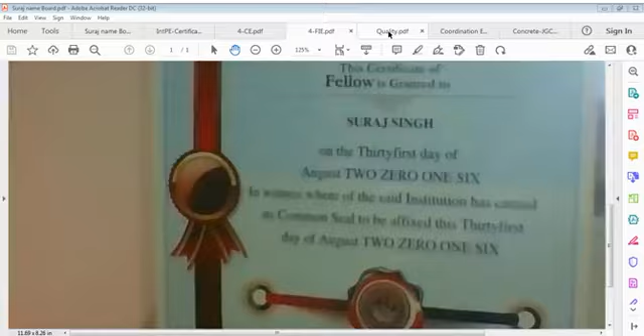Fellow institution of engineers, FIE, quality file, coordination file, and Japan's specifications of concrete are very important for this time, and of course we have to discuss about this.

I close with my certificates, chartered engineer as well as fellow. Now the important files are here: issue of quality, that is very important - quality coordination, issue of quality, issue of coordination. First we discuss a little on this and then move on to the concrete file, which is the intensive talk today.

Quality - is it important or is it not important? We have a duty to decide what we have to do, how we have to do it, what can we do. All these are important issues that we should be serious about.

It's easy to say, saying is always easy, but achieving is the important one. We can say okay, I will do it sometimes, but can we do it? That's the point of view.

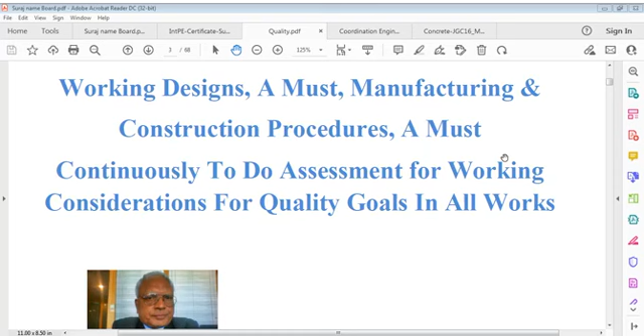So we have to keep this in mind - working designs are a must, manufacturing and construction procedures are a must, continuously doing assessment for working considerations for quality goals in all works. And we can say fixed quality in our country, Bharat, India - come what may, no excuse for concessions. Work quality cannot be compromised, and therefore we do not intend to compromise just in the name of a fragile existing quality system, compliance, formality, and excuse.

Quality system may fail, but works quality must perform and be delivered. But it doesn't happen currently in the entire scenario in our Bharat, India. And we say, as preliminary considerations, where does quality exist? Nowhere, I can say. Generally the answer is unsuccessful to find anywhere.

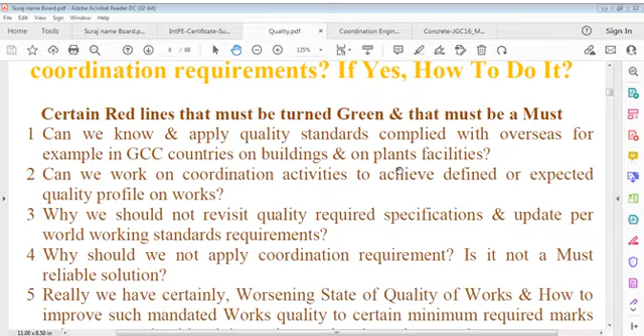Can we know and apply quality standards complied with overseas, for example in GCC countries, on buildings and on plant facilities? Can we work on coordination activities to achieve defined or expected quality profile on works? Why should we not revisit quality required specifications and update per world working standards requirements?

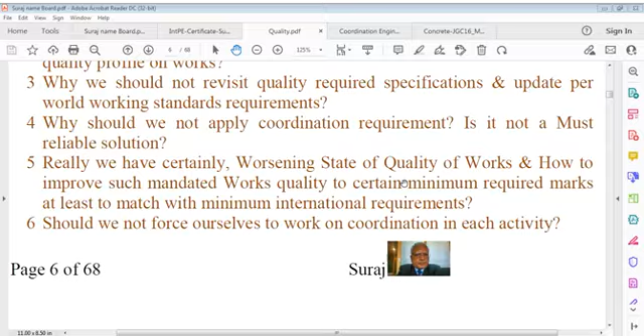Why should we not apply coordination requirement? Is it not a must reliable solution? Really, we have a certainly worsening state of quality of works, and how to improve such mandated works quality to certain minimum required marks, at least to match with minimum international requirements. Should we not force ourselves to work on coordination in each activity?

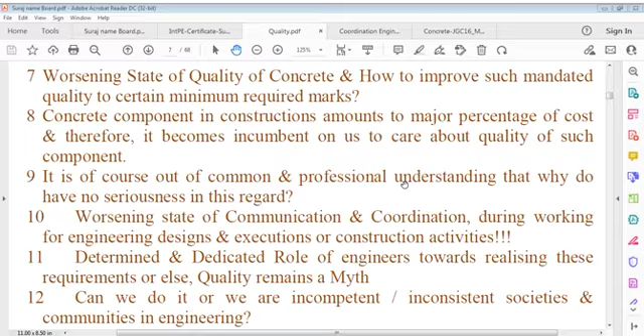Worsening state of quality of concrete, and how to improve such mandated quality to certain minimum required marks. Concrete component in construction amounts to a major percentage of cost, and therefore it becomes incumbent on us to care about quality of such component. It's of course out of common professional understanding why do you have no seriousness in this regard? Worsening state of communication and coordination during working for engineering designs and executions or construction activities.

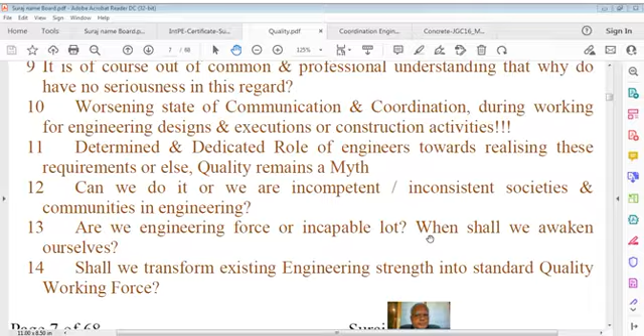Determined and dedicated role of engineers towards these requirements, or else quality remains a myth. Can we do it, or are we inconsistent societies and communities in engineering? Are we an engineering force or an incapable lot? When shall we awaken ourselves? Shall we transform existing engineering strength into a standard quality working force? Who shall decide about all such questions that are being faced?

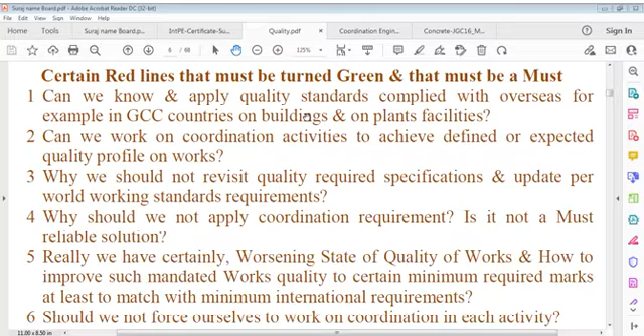We have to find a solution, and it's a fact, because I'm calling them red lines. We have to make them green, and that's why certain red lines must be turned green. That must say must, you cannot say no, it should be or it shall be. No, we have to do this. How to do this, that is a big question mark. That's why to find the answer, engineers' deliberation is a must. That's also a very important point. And deliberation, that's what my talk is a part of. We are deliberating on that.

Now going to coordination engineering projects, and that's a very important point. Coordination in engineering projects concerns the public and engineers. And of course engineers are related, engineers are responsible for what I'm saying. That's very important, you know.

Coordination is that part of life without which we cannot move. Everybody coordinates to itself. My mind coordinates to body, body coordinates to other bodies. We coordinate ourselves, and if we don't coordinate, we find mistakes. We do mistakes, and this coordination I'm talking about is engineering coordination, work coordination, technical and non-technical coordination both.

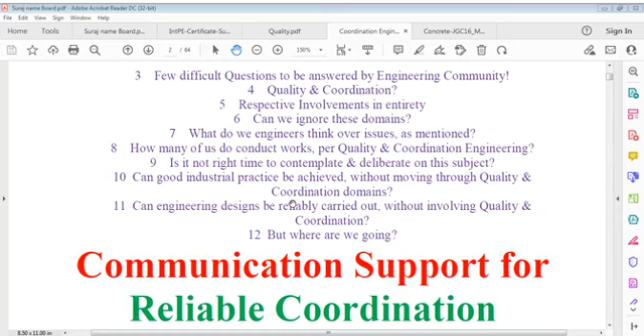And there's a gap between quality engineer and quality assurance or quality requirement engineer. We'll discuss that later on. Is it not right time to contemplate and deliberate on this subject? I say, always time is right. Then we say, can good industrial practice be achieved without moving through quality and coordination domains? That's a big question.

Can engineering design be reliably carried out without involving quality and coordination? This is a question which everybody has to think and answer. Again I say, can engineering designs be reliably carried out without involving quality and coordination?

But where are we going to? I have missed, I'm sorry. Again I repeat these questions for you. You have to think many times. Number one, is coordination engineering a must on every project? Project means all performance activities involved from pre-design to final completion of complete construction. Few difficult questions for the engineering community to answer: quality and coordination, their respective involvement in entirety.

Can we ignore these domains? What do we engineers think over issues as mentioned? How many of ourselves do conduct work for quality and coordination engineering? Is it not right time to contemplate and deliberate on this subject? Can good industrial practice be achieved without moving through quality and coordination domain? Can engineering designs be reliably carried out without involving quality and coordination? But where are we going to? And that's what is a communication support for reliable coordination.

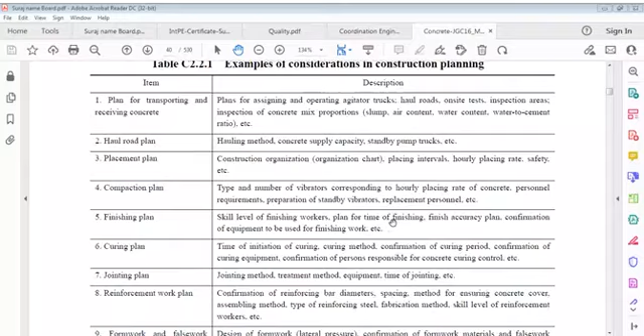If you see, here we are somewhere on quality. I remember we crossed these flow charts. We were on quality. Yeah, this is construction planning. We have gone through examples. We have taken finishing, what are examples of construction planning, and this is determination of concreting methods, determination of construction performance of concrete. No, I think this was not that one.

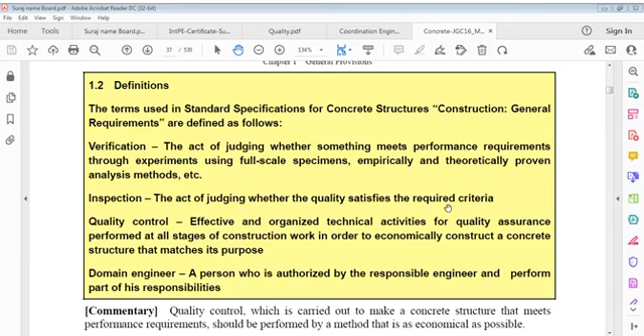I will say constitution of construction planning, and before that there was design document specifications. We are somewhere here, I think, design of structures. Here is general and approved construction, shall be approved construction. Yeah, I think I did construction plan. Definitions, verifications, inspections, quality control. Yeah, domain engineer, we defined that. Also we remember we defined it. Construction plan, okay, we did that one also.

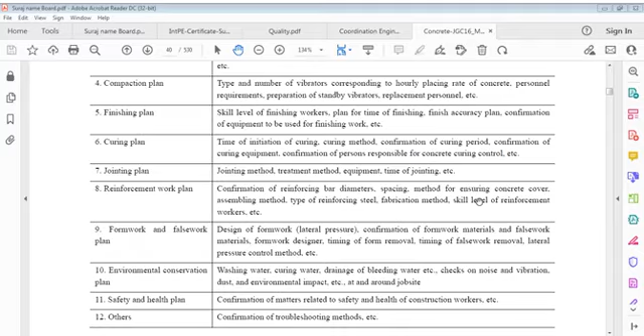Then it was done, and we had to go to construction planning. A construction plan shall be prepared taking into consideration environmental conditions and construction conditions for the construction site, giving consideration for construction safety and environment. Okay, examples of considerations in construction planning: plan for transportation and receiving, haul road plan, compaction plan, finishing plan, jointing plan. So this we had done. Determination of concreting method.

I don't remember, quality, it was something related to. Only materials of proven quality shall be used as concrete materials. Let's read this first of all, what it says, because it's very important. Even if it is revised, no problem, it's revisited, no problem, that's not the point. It says using appropriate materials. Materials of proven quality shall be used as concrete materials. Using appropriate materials is very important for producing concrete with required performance.

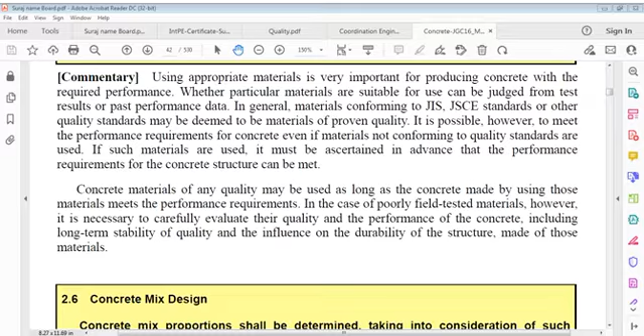Using appropriate materials is very important for producing concrete with required performance. Whether particular materials are suitable for use can be judged from test results or past performance data. In general, materials conforming to Japanese specifications, JSCE standards, or quality standards may be deemed to be materials of proven quality. It's possible, however, to meet performance requirements for concrete even if materials not conforming to quality standards are used. If such materials are used, it must be ascertained in advance that performance requirements for the concrete structure can be met.

Concrete materials of whatever quality may be used as long as concrete made using those materials meets performance requirements. In case of poorly field-tested materials, however, it is necessary to carefully evaluate the respective quality and performance of the concrete, including long-term stability of quality and influence on durability of structures made of those materials. Concrete mix design: concrete mix proportions shall be determined taking into consideration such factors as constraints, related concrete plants, availability of materials, and economy, including transportation cost, so that required performance of concrete can be achieved.

Mix design refers to the series of tasks performed to specify materials and mix proportions so that performance requirements for concrete can be met. Usually in the mix design process, materials and respective mix proportions are assumed and trial mixing is carried out. This cycle is repeated until it is confirmed that concrete mixes made this way meet all performance requirements. Characteristic values, we define that.

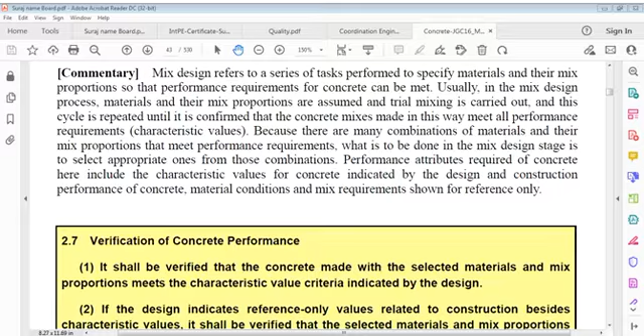Because there are many combinations of materials and their respective proportions that meet performance requirements, what is to be done in the mix design stage is to select appropriate ones from those combinations. Performance attributes required of concrete include characteristic values for concrete indicated by design, and construction performance of concrete, material conditions and mix requirements shown for reference only.

Verification of concrete performance: it shall be verified that concrete made with selected materials and mix proportions meets characteristic value criteria indicated by design.

Characteristic grade of concrete is very important that we have to consider when we design. Then what percentages, or mixing by weight methods, means weighing every ingredient. We decide that, not by volume.

If design indicates reference only values related to construction besides characteristic values, it shall be verified that selected materials and mix proportions meet those reference only values, or meet concrete performance requirements on which the reference only values are based.

Some commentaries here. I think we had gone through this. I remember this equation we discussed. Again, I read it, no issue.

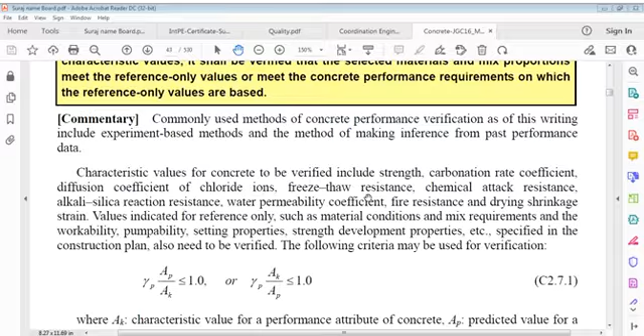Commonly used methods of concrete performance verification as of this writing include experiment-based methods and methods of making inference from past performance data. Characteristic values for concrete to be verified include strength, carbonation rate or carbonation rate coefficient, and diffusion coefficient of chloride ions. These are three items: strength, carbonation issue, and chloride penetration issue.

Then we have freeze-thaw resistance, for where ice and snowfall exist, and chemical attack resistance, sulfate and chloride attacks like the alkali silica reaction resistance, water permeability coefficient, water penetration, fire resistance, and drying shrinkage strain, etc.

So there are so many requirements, you can say. You can list this in your mind also. First is strength, very important point, then carbonation and chlorination or chlorides, freezing and thawing, chemical impacts on concrete, alkali silica and water permeability, fire resistance and drying shrinkage, and many more could be.

Values indicated for reference only include material conditions and mix requirements: workability, pumpability, and setting property. Workability we generally use, so slump control is taken - slump is workability. This leads to pumpability also, and that leads to how to pour it, and of course setting properties after pouring. After setting properties comes strength development properties, and we can say it is specified in the construction plan that we have to verify.

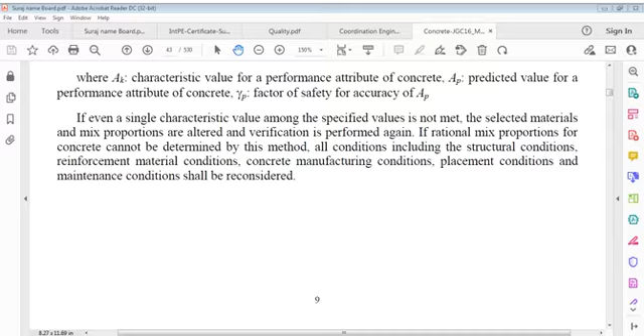This is basic. Now, confirmation and alteration of construction plan - that's also an important point. It must be confirmed by an appropriate method that the concrete construction plan meets requirements for construction work, and that performance requirements for the structure are met.

Whatever change we make in the construction plan should be made so as to minimize its influence. As a general principle, changes in construction plan should be limited to concrete mix proportions and construction methods, and not to something else. If the construction plan differs from reference values indicated at the design stage, cracking checks at the construction stage shall be made again under conditions reflecting the construction plan.

Here is some commentary. We can read it again, though I think I have done it before, no problem.

The construction plan must meet requirements for construction work, and must be such that the concrete structure built in accordance with the plan meets performance requirements. Contractor submits a construction plan in writing to the owner, and the owner checks whether the structure shown in design drawings and specifications can really be constructed, and approves the construction plan.

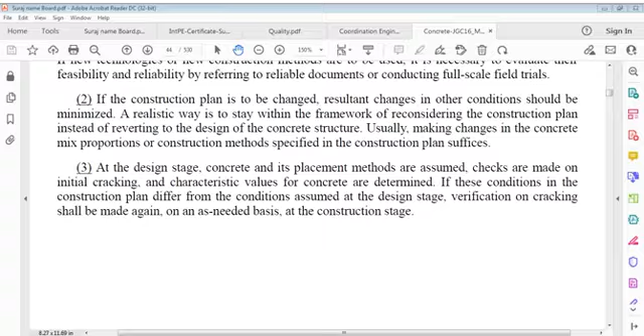Construction now we talk of. Construction of a concrete structure shall be carried out in accordance with the construction plan, because we have planned it. So that's one part: we have planned it, and it shall be done accordingly.

Construction of a concrete structure shall be carried out under supervision of a domain engineer with sufficient knowledge and experience in construction of concrete structures, stationed at the construction site. If the construction plan cannot be followed at the construction stage, appropriate measures shall be taken so that performance requirements determined at the design stage can be met.

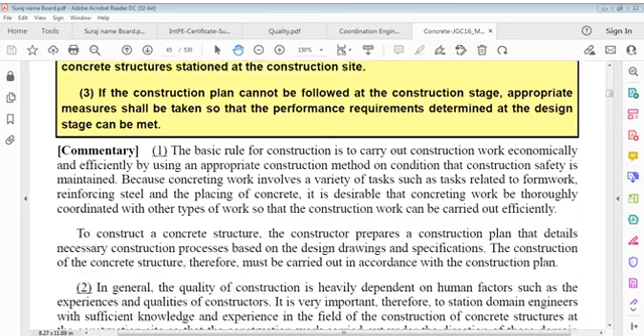The basic rule for construction is to carry out construction work economically and efficiently by using an appropriate construction method, on condition that construction safety is maintained. Because concreting work involves a variety of tasks such as form work, reinforcing steel, and placing of concrete, it is desirable that concreting work be thoroughly coordinated with other types of works so that construction work can be carried out efficiently. And here what we talk of is coordination, technical and engineering coordination.

To construct a concrete structure, the constructor or contractor prepares a construction plan detailing necessary construction processes based on design drawings and specifications. Construction of a concrete structure therefore must be carried out in accordance with the construction plan, which is based on communication and coordination. In general, quality of construction is heavily dependent on human factors such as experience and quality of constructors. Very important therefore is to station domain engineers with sufficient knowledge and experience in the field of construction of concrete structures at the construction site, so that construction work is carried out under direction of these domain engineers.

In a construction project, incidents not expected at the planning stage may occur at the construction stage. It's not always possible, therefore, to carry out construction in accordance with the construction plan. If it's difficult to follow the construction plan in a real construction project, appropriate measures must be taken following domain engineers' instructions, so that required performance can be achieved.

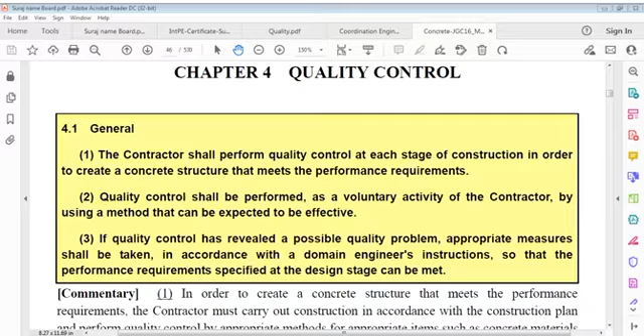Quality control shall be performed as a voluntary activity of the contractor, though it is legal. Quality control shall be performed as a voluntary activity of the contractor by using a method that can be expected to be effective. If quality control has revealed a possible quality problem, appropriate measures shall be taken in accordance with the domain engineer's instruction, so that performance requirements specified at the design stage can be met.

Now some comments say: in order to create a concrete structure that meets performance requirements, the contractor must carry out construction in accordance with the construction plan and perform quality control by appropriate methods.

For appropriate items such as concrete materials, reinforcing materials, equipment and construction methods, ensure that required quality is achieved at each stage of construction.

It is advisable, however, to perform quality control only for necessary items as often as necessary. Instead of conducting many types of tests and collecting a large amount of data, one way to check on quality on the basis of test results, besides actually conducting tests, is to examine manufacturers' test reports, as in the case of conforming products.

Usually wide variations in quality of concrete placed to build a structure not only increase the possibility of occurrence of problems at construction stage, it also necessitates use of a large factor of safety at mix design stage so as to achieve required strength. That makes the construction process uneconomical and in many cases causes decreases in durability.

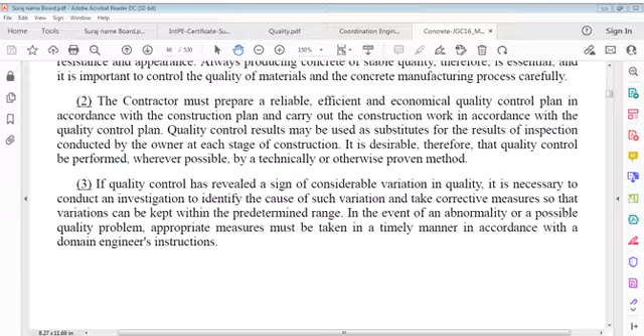In the event of abnormality or a possible quality problem, appropriate measures must be taken in a timely manner in accordance with the domain engineer's instruction.

Inspection. The owner shall conduct inspection at each stage of construction and upon completion of the structure on the owner's own responsibility. Actually it should be the engineer, no problem.

Let us see what the Japanese specification says. The owner of a structure shall draw up an inspection plan in accordance with design drawings and specifications, taking into consideration degree of importance, intended use, and purpose of the structure.

Inspection shall be conducted in accordance with the inspection plan by a method of proven reliability.

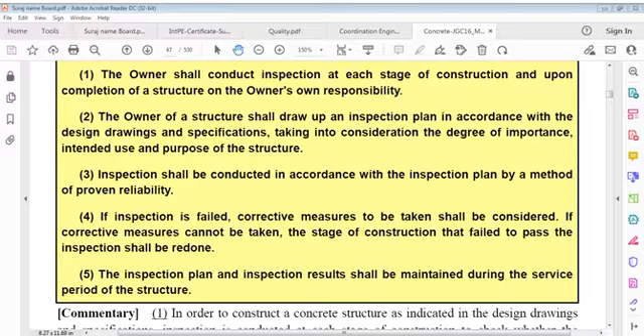If inspection is failed, corrective measures to be taken shall be considered. If corrective measures cannot be taken, the stage of construction that failed to pass inspection shall be redone. The inspection plan and inspection results shall be maintained during the service period of the structure.

What comments do we have? In order to construct concrete structures as indicated in design drawings and specifications, inspection is conducted. The video and audio went down, and we have to be very careful about why it went down. No problem, it's back again.

In order to construct a concrete structure as indicated in design drawings and specifications, inspection is conducted at each stage of construction to check whether construction work being carried out is adequate or not. Required performance of a concrete structure can be ensured by checking on performance requirements such as safety at the design stage and conducting inspection at the construction stage.

Inspection therefore must be conducted on the responsibility of the owner of the structure. Performance of a newly completed concrete structure should ideally be inspected directly. Items related to a concrete structure that can be inspected, however, are limited to only a fraction, namely concrete surface condition, locations, shapes, dimensions, etc. of structural members, of all inspection items.

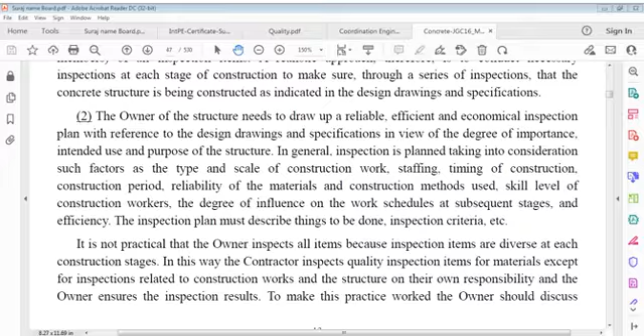The inspection plan must describe things to be done, inspection criteria, etc. It's not practical for the owner to inspect all items because inspection items are diverse at each construction stage. In this way, the contractor inspects quality inspection items for materials, except for inspection related to construction works and structure, on their own responsibility, and the owner ensures the inspection results.

The owner ensures inspection results. To make this practice work, the owner should discuss inspection methods with the contractor before actual construction begins. Results of the discussion should be recorded in written documents, where the owner records on an inspection planning document while the contractor records on a construction planning document.

Here, 'owner' refers to the owner's representative, who can be an engineer. The engineer works on behalf of the owner, and the contractor also works on behalf of the owner, because the owner of the structure has to judge acceptability of the concrete structure through inspection.

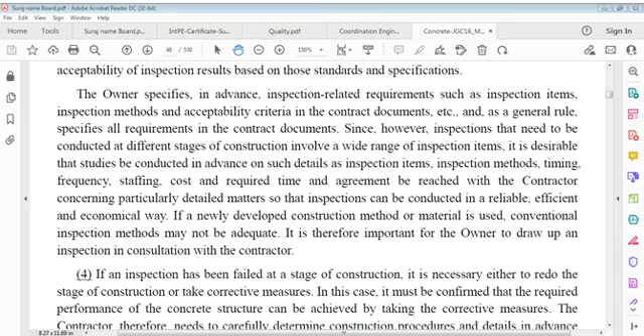If a newly developed construction method or material is used, conventional inspection methods may not be adequate. It is therefore important for the owner to draw up an inspection plan in consultation with the contractor.

If an inspection has failed at a stage of construction, it is necessary either to redo that stage or take corrective measures. In this case, it must be confirmed that the required performance of the concrete structure can be achieved by taking corrective measures.

The contractor therefore needs to carefully determine construction procedures and details in advance in connection with construction tasks that are difficult to redo. If an inspection has failed and neither corrective measures nor redoing construction is possible, it is necessary to evaluate the influence of the problem on the required performance of the concrete structure and take appropriate measures, such as demolishing and reconstructing the structure, or altering the maintenance plan and using the existing structure.

Inspection records are documents that certify the concrete structure has been constructed in accordance with the construction plan and as indicated in design drawings and specifications. Inspection records must therefore be maintained during the service period of the concrete structure. If an inspection fails at one or more stages of construction, it is important to record in detail the facts, including corrective measures taken.

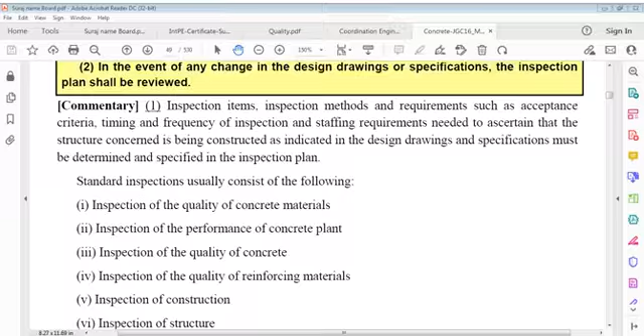Inspection items, inspection methods, and requirements such as acceptance criteria, timings and frequency of inspection, and staffing requirements needed to ascertain that the structure concerned is being constructed as indicated in design drawings and specifications must be determined and specified in the inspection plan.

Standard inspections usually consist of the following: inspection of quality of concrete materials, inspection of performance of the concrete plant (batching plant or mixer), inspection of quality of concrete, inspection of quality of reinforcing materials, inspection of construction, and inspection of structure. So: concrete materials, concrete plant, concrete quality, reinforcing material quality, construction inspection, and structures.

These are the main ones. A series of inspections conducted in connection with construction of a concrete structure includes inspection of materials, that is concrete and reinforcing bars, conducted to ensure that materials used are appropriate, and inspection of construction, conducted mainly to ensure that structures and their members meet dimensional requirements.

Specified reinforcing bars have been placed at specified locations. Concrete has been uniformly placed and compacted, and curing has been carried out as required.

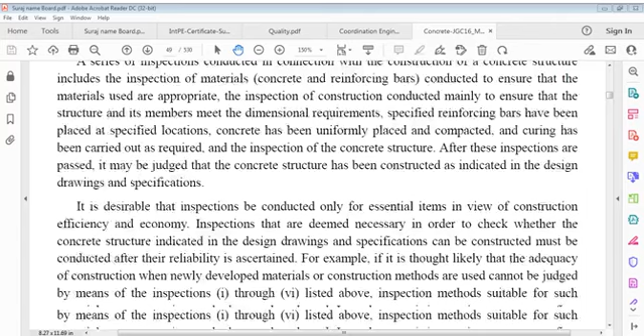It's desirable that inspection be conducted only for essential items in view of construction efficiency and economy. Inspections deemed necessary to check whether a concrete structure indicated in drawings and specifications can be constructed must be conducted after reliability is ascertained.

For example, if it's thought likely that adequacy of construction when newly developed materials or construction methods are used cannot be judged by means of inspections, then inspection methods suitable for such materials or construction methods must be adopted.

In such cases, it is very important to confirm inspection details through in-depth discussion between owner and contractor, because the inspection plan is drawn up on the basis of design drawings and specifications. If the design drawings or specifications have been changed, the inspection plan must of course be reviewed.

Conduct of inspection: inspection shall be conducted in accordance with the inspection plan. The person responsible for inspection shall judge acceptability of inspection results in accordance with predetermined evaluation criteria.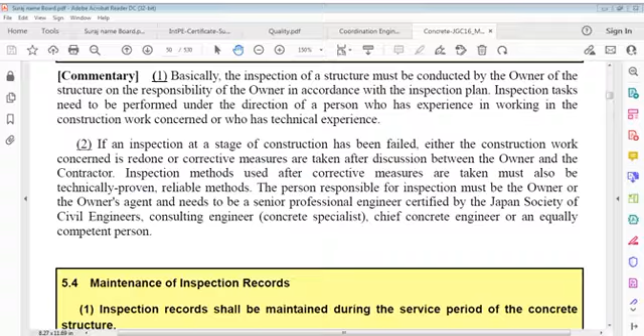The person responsible for inspection must be the owner or owner's agent and needs to be a senior professional engineer certified by the Japan Society of Civil Engineers, a consulting engineer, concrete specialist, chief concrete engineer, or an equally competent person.

Maintenance of inspection records. Inspection records shall be maintained during the service period of the concrete structure. Inspection records covering necessary items shall be maintained in an appropriate format with reference to maintenance guidelines.

Inspection records are important records or documents confirming required performance of the concrete structure, like design drawings and specifications and the inspection plan. Therefore, inspection records must be maintained. If an inspection has failed and corrective measures have been taken, records regarding their details must also be maintained.

Because inspection records are important as initial values for maintenance of a newly completed concrete structure, they must be maintained as a source of reference information so that safety, serviceability, etc. of concrete structures can be ascertained.

Construction records, general: the owner of a concrete structure shall maintain construction records during the service period of the concrete structure.

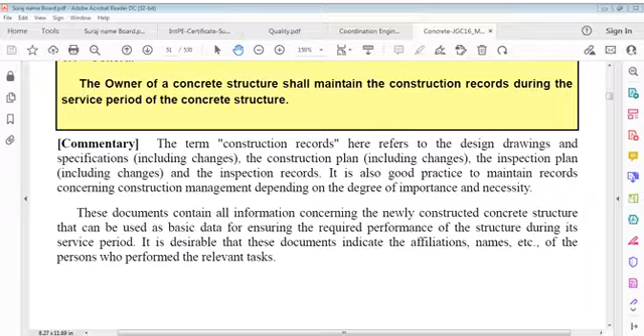These documents contain all information concerning the newly constructed concrete structure that can be used as basic data for ensuring required performance of the structure during its service period. It is desirable that these documents indicate affiliations, names, etc. of persons who performed relevant tasks—desirable meaning not necessary.

Construction standards. General construction standards: purpose of this specification, materials and construction.

Construction standards of the standard specifications for concrete structures aim to make it possible, in concreting work for new construction of an ordinary civil engineering structure, to construct a concrete structure of a certain level of quality by carrying out items indicated herein without paying painstaking attention.

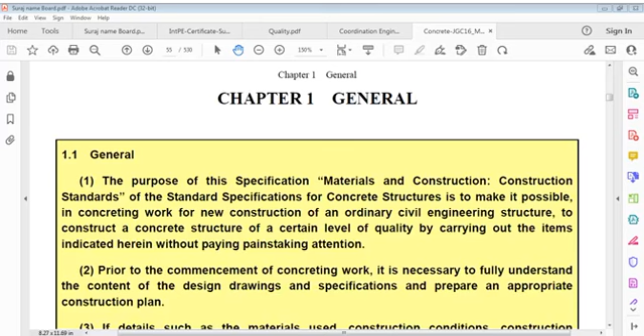Repeating: the purpose of this specification—materials and construction, that is, construction standards of the standard specification for concrete structure—is to make it possible in concrete work for new construction of an ordinary civil engineering structure to construct a concrete structure of a certain level of quality by carrying out items indicated herein without paying painstaking attention. Prior to commencement of concrete work, it is necessary to fully understand the contents of design drawings and specifications and prepare an appropriate construction plan.

If details such as materials used, construction conditions, construction environment or construction methods deviate from conditions indicated in construction standards of this specification, a construction plan consistent with construction general requirements of this specification shall be prepared and construction shall be carried out accordingly. For items indicated in construction, special concretes of this specification should be referred to.

Commentary. Concrete work varies very widely because of diverse elements and conditions, such as type of structure, materials used, construction conditions, construction environment and equipment used for construction. It's also true, however, that most concrete construction projects involve very few special items.

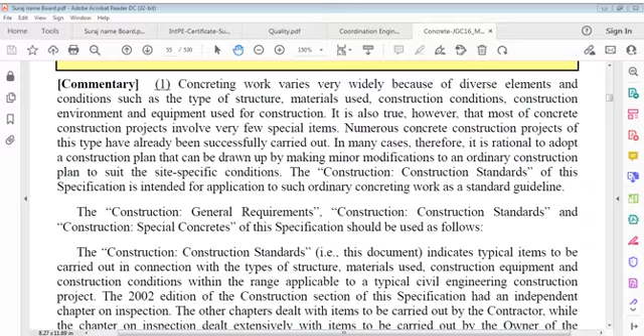Numerous concrete construction projects of this type have already been successfully carried out in many cases. Therefore, it's rational to adopt a construction plan that can be drawn up by making minor modifications to an ordinary construction plan to suit site specific conditions. Construction standards of this specification is intended for application to such ordinary concreting work as a standard guideline.

Construction general requirements. Construction standards and construction special concretes of this specification should be used as follows: that is, construction special concrete, and here construction standards, this document, indicates typical items to be carried out in connection with type of structure, materials used, construction equipment and construction conditions within a range applicable to a typical civil engineering construction project.

The 2002 edition of the construction section of this specification had an independent chapter on inspection. Other chapters dealt with items to be carried out by the contractor, while the chapter on inspection deals extensively with items to be carried out by the owner of the structure.

Construction sections of the current specification therefore have separate volumes, construction standards and construction inspection standards for construction and inspection, to clarify responsibilities of each party and make this specification easier to use. Inspection related items to be carried out by contractors, such as items related to receiving materials, are described in construction. Construction standards and construction inspection standards are designed for use as a kind of standard specifications for many construction projects.

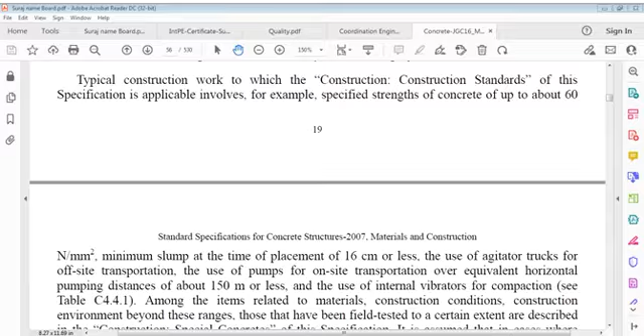Typical construction work to which construction or construction standards of this specification is related or applicable involves, for example, specified strength of concrete of up to about 60 Newton per square millimeter, minimum slump at time of placement of 16 centimeters or less, use of agitator trucks for off-site transportation, use of pumps for on-site transportation over an equivalent horizontal pumping distance of 150 meters or less, and use of internal vibrators for compaction.

Among items related to materials, construction conditions, and construction environment beyond these ranges, those that have been field tested to a certain extent are described in construction special concretes of this specification. It's assumed that in cases where items related to material, construction conditions and construction environment beyond these ranges are involved, in cases where special attention is required, or in cases where special expertise is to be used effectively,

a construction plan is drawn up on a case-by-case basis in accordance with construction general requirements of this specification. Verification is made and then construction is carried out. In all civil engineering construction projects, it is important to draw up an appropriate construction plan according to site specific conditions prior to commencement of construction.

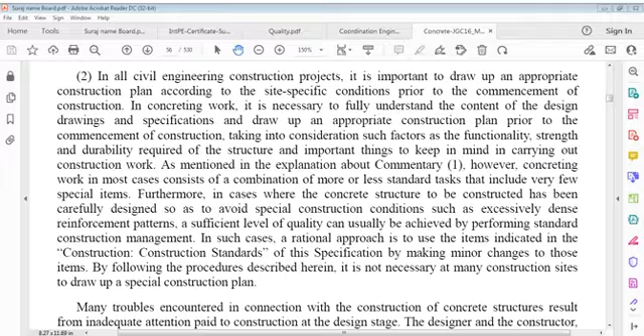As mentioned in the explanation about commentary, however, concreting work in most cases consists of a combination of more or less standard tasks that include very few special items. Furthermore, in cases where the concrete structure to be constructed has been carefully designed so as to avoid special construction conditions such as excessively dense reinforcement patterns, a sufficient level of quality can usually be achieved by performing standard construction management.

Many troubles encountered in construction of concrete structures result from inadequate attention paid to construction at the design stage. Designer and constructor therefore need to know the assumptions made by the other party within their respective scopes of work.

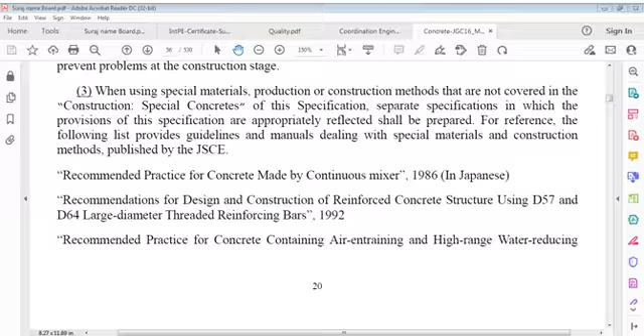The following list provides guidelines and manuals dealing with special materials and construction methods, published by JSCE: Recommended practice for concrete made by continuous mixer, 1986, Japanese; Recommendations for design and construction of reinforced concrete structures using D57 and D64 large diameter threaded reinforcing bars, 1992; Recommended practice for concrete containing air entraining and high range water reducing agents.

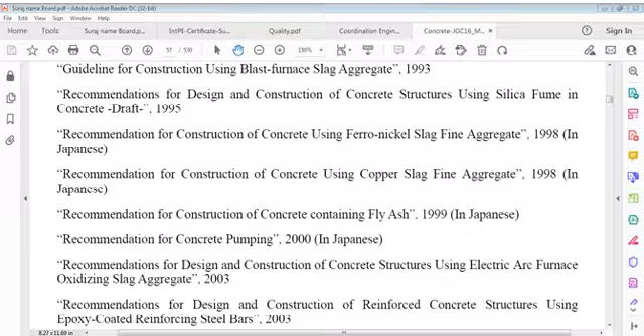Recommendations for construction of high fluidity concrete; Guideline for construction using blast furnace slag aggregate, 1993; Recommendations for design and construction of concrete structures using silica fume in concrete; Recommendation for construction of concrete using ferro-nickel slag fine aggregate; Recommendation for construction of concrete using copper slag fine aggregate; Recommendation for construction of concrete containing fly ash; and Recommendation for concrete pumping, 2000, Japanese.

Recommendations for design and construction of concrete structures using electric arc furnace oxidizing slag aggregate.

Recommendations for design of reinforced concrete structures using epoxy coated reinforcing steel bars; Recommendations for mix design and construction of concrete based on placeability; Recommendations for design, fabrication and evaluation of anchorages and joints in reinforcing bars; Recommendations for concrete repair and surface protection of concrete structures.

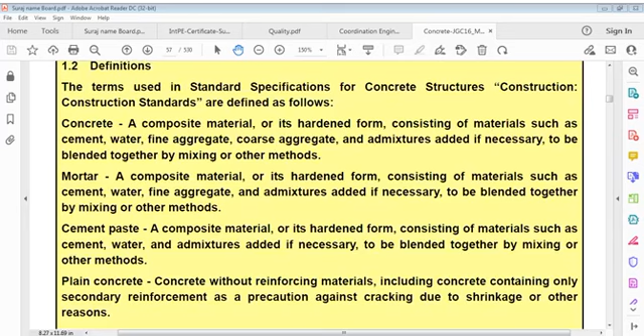Terms used in standard specifications for concrete structures. Construction standards are defined as follows: concrete, mortar, cement paste, plain concrete, reinforced concrete, prestressed concrete.

Mortar is a composite material, or its hardened form, consisting of materials such as cement, water, fine aggregate, and admixtures added if necessary, blended together by mixing or other methods.

Cement paste is a composite material, or its hardened form, consisting of materials such as cement, water, and admixtures added if necessary, blended together by mixing or other methods.

Plain concrete is concrete without reinforcing steel materials, including concrete containing only secondary reinforcement as a precaution against cracking due to shrinkage or other reasons. Reinforced concrete is concrete strengthened by reinforcing bars, designed on the assumption that the two materials act together in resisting external forces.

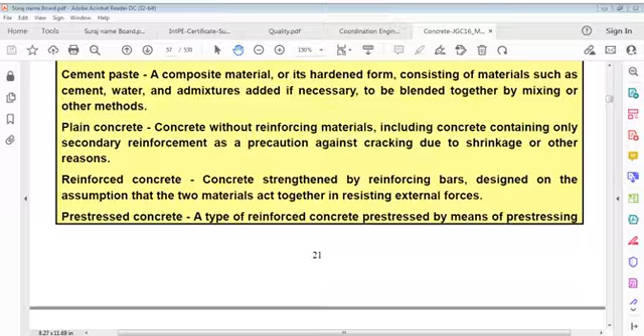Prestressed concrete is a type of reinforced concrete prestressed by means of prestressing steel, etc.

Aggregate: sand, gravel, sea sand, crushed sand, crushed stone, blast furnace slag fine aggregate, blast furnace slag coarse aggregate, and other similar materials which are mixed with cement and water to produce mortar or concrete.

Sieve: a wire sieve specified in JIS Z8801 used for tests of concrete and concrete materials. Fine aggregate: aggregate entirely passing a 10 mm sieve with more than 85% of its weight passing a 5 mm sieve. Coarse aggregate: aggregate with more than 85% of its weight retained on a 5 mm sieve.

Sand: fine aggregate formed from rocks through natural processes. Gravel: coarse aggregate formed from rocks through natural processes.

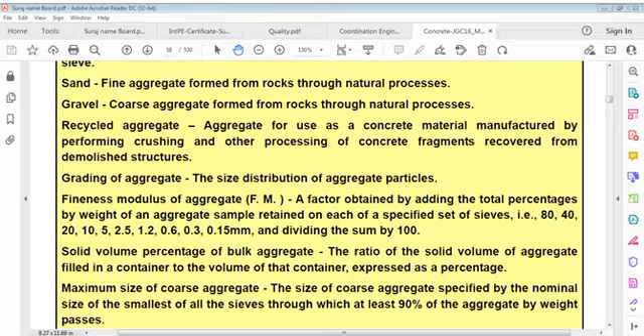Fineness modulus of aggregate (Fm): a factor obtained by adding the total percentages by weight of an aggregate sample retained on each of a specified set of sieves, namely 80, 40, 20, 10, 5, 2.5, 1.2, 0.6, 0.3 and 0.15 mm, and dividing the sum by 100.

Solid volume percentage of bulk aggregate: ratio of the solid volume of aggregate filled in a container to the volume of that container, expressed as a percentage.

Maximum size of coarse aggregate: specified by the nominal size of the smallest of all sieves through which at least 90% of the aggregate by weight passes.

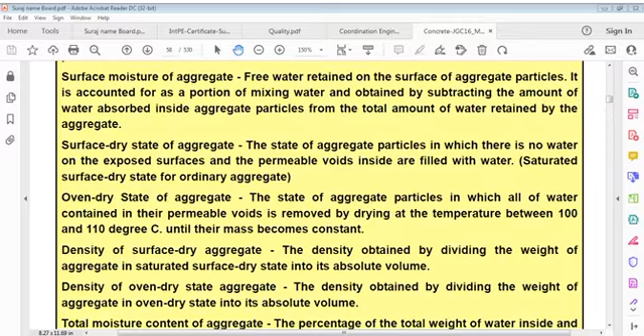Oven dry state of aggregate: the state of aggregate particles in which all water contained in permeable voids is removed by drying at a temperature between 100 and 110 degrees Celsius until their mass becomes constant.

Density of surface dry aggregate: the density obtained by dividing the weight of aggregate in saturated surface dry state by its absolute volume.

Density of oven dry state aggregate: the density obtained by dividing the weight of aggregate in oven dry state by its absolute volume.

Total moisture content of aggregate: the percentage of total weight of water inside and on surfaces of aggregate to the weight of aggregate in oven dry state.

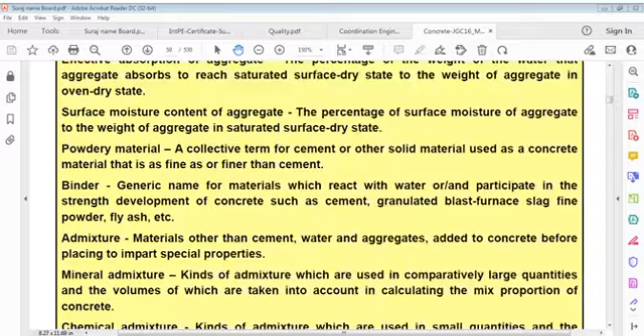Admixture: materials other than cement, water and aggregate added to concrete before placing to impart special properties. Mineral admixture is a kind of admixture.

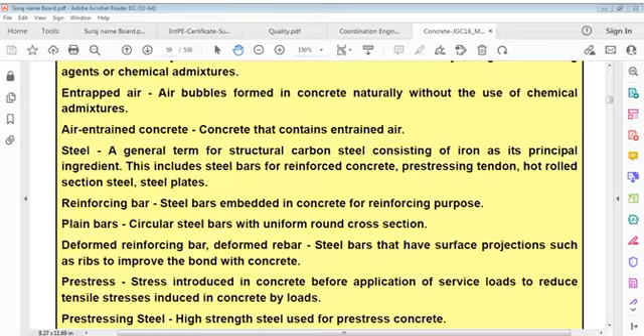Steel: a general term for structural carbon steel consisting of iron as its principal ingredient. This includes steel bars for reinforced concrete, pre-stressing tendons, and hot rolled section steel plates.

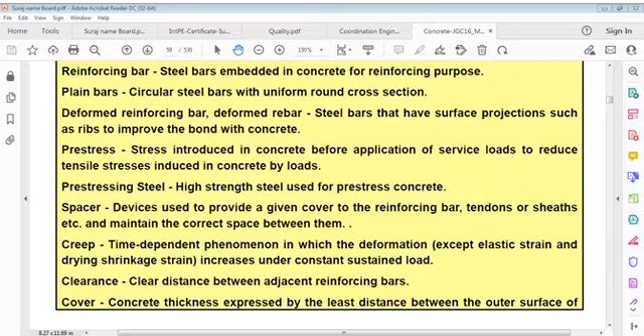Reinforcing bars: steel bars embedded in concrete for reinforcing purpose. Plain bars: circular steel bars with uniform round cross section. Deformed reinforcing bars, or deformed rebars: steel bars that have surface projections such as ribs to improve bond with concrete.

Pre-stressing: stress introduced in concrete before application of service loads to reduce tensile stresses induced in concrete by loads. Pre-stressing steel: high strength steel used for pre-stress concrete. Spacer devices: used to provide a given cover to reinforcing bars, tendons or sheaths, and maintain correct spacing between them.

Creep: time dependent phenomenon in which deformation, except elastic strain and shrinkage strain, increases under constant sustained load. Clearance: clear distance between adjacent reinforcing bars.

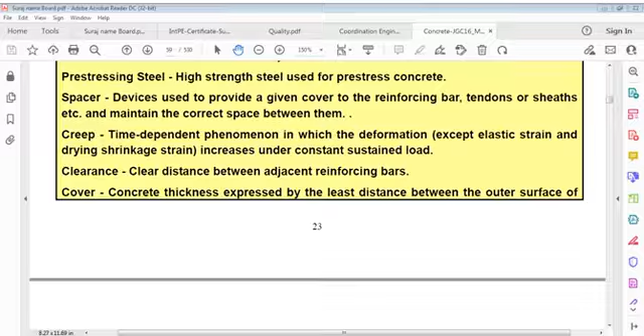Cover: concrete thickness expressed by the least distance between the outer surface of concrete and the surface of steel or sheaths. Mix proportion: proportion or quantity of constituent materials to produce a desired quantity of concrete or mortar. Trial mixing: carried out to determine whether a specified concrete can be obtained from a designed mix.

Characteristic compressive strength of concrete: strength on which structural design is based, generally the compressive strength at 28 days, notation F-CK. Mix proportioning strength, or target strength: compressive strength used to select mix proportion of concrete, generally the compressive strength at 28 days, notation F-CR.

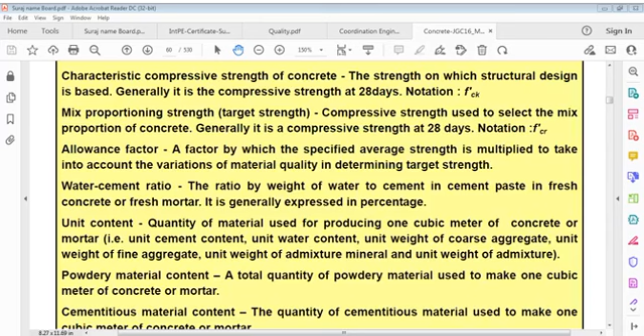Allowance factor: a safety factor by which specified average strength is multiplied to take into account variation of material quality in determining target strength. Water cement ratio: ratio by weight of water to cement in cement paste in fresh concrete or fresh mortar, generally expressed in percentage.

Unit content: quantity of material used for producing 1 cubic meter of concrete or mortar, that is, unit cement content, unit water content, unit weight of coarse aggregate, unit weight of fine aggregate, unit weight of mineral admixture, and unit weight of admixture.

Powdery material content: total quantity of powdery material used to make 1 cubic meter of concrete or mortar. Cementitious material content: quantity of cementitious material used to make 1 cubic meter of concrete or mortar. Sand aggregate ratio: ratio of absolute volume of fine aggregate to that of total aggregate.

Sand aggregate ratio: ratio of absolute volume of fine aggregate to that of total aggregate, expressed in percentage, notation s/a. Unit volume of dry rodded coarse aggregate: bulk volume of coarse aggregate to produce 1 cubic meter of concrete, obtained by dividing unit weight of coarse aggregate into its weight per unit bulk volume.

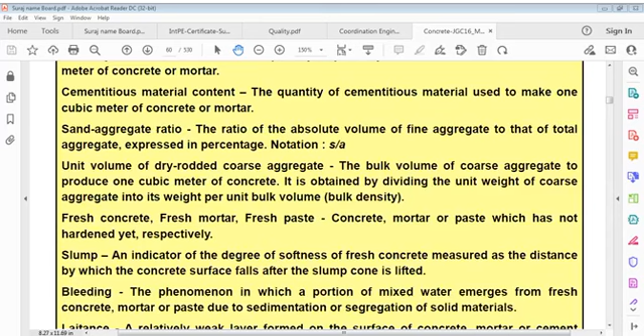Fresh concrete, fresh mortar, fresh paste: concrete, mortar or paste which has not hardened yet. Slump: an indicator of the degree of softness of fresh concrete, measured as the distance by which the concrete surface falls after the slump cone is lifted.

Bleeding: phenomenon in which a portion of mixed water emerges from fresh concrete, mortar or paste due to sedimentation or segregation of solid materials. Laitance: a relatively weak layer formed on the surface of concrete, mortar or cement paste by tiny particles brought to the surface during bleeding.

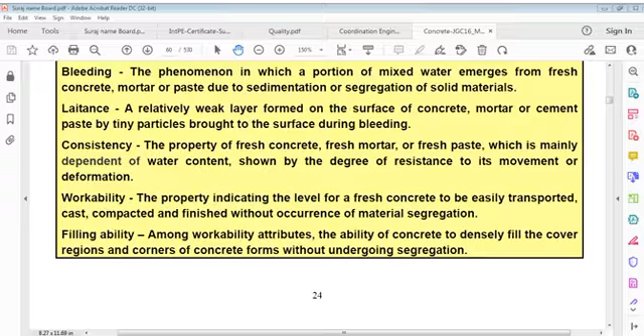Consistency: property of fresh concrete, fresh mortar or fresh paste which is mainly dependent on water content, shown by degree of resistance to its movement or deformation.

Workability: property indicating the level at which fresh concrete can be easily transported, cast, compacted and finished without occurrence of material segregation. Filling ability: among workability attributes, the ability of concrete to densely fill cover regions and corners of concrete forms without undergoing segregation.

Pumpability: degree of ease with which fresh concrete or fresh mortar can be transported by a concrete pump. Placing height: height of concrete placed in one lift. Free fall height: height from which concrete falls in an exposed condition from a chute or pipe when concrete is placed.

Compaction height: maximum height from the bottom of the concrete form or the surface of previously placed concrete to the surface on which construction workers stand while performing compaction of concrete.

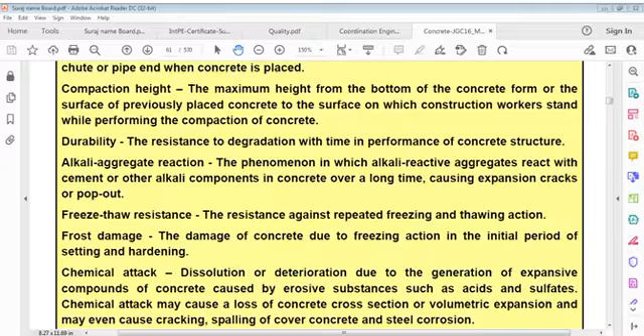Freeze-thaw resistance: resistance against repeated freezing and thawing action. Frost damage of concrete due to freezing action in the initial period of setting and hardening.

Chemical attacks: dissolution or deterioration due to generation of expansive compounds of concrete caused by erosive substances such as acids and sulfates. Chemical attack may cause a loss of concrete cross section or volumetric expansion, and may even cause cracking, spalling of concrete cover, and steel corrosion.

Water tightness: property of having low water and moisture permeation.

Autogenous shrinkage: phenomenon in which concrete, mortar and cement paste shrink due to reduction in volume during cement hydration. Crack resistance: resistance of concrete to crack initiation.

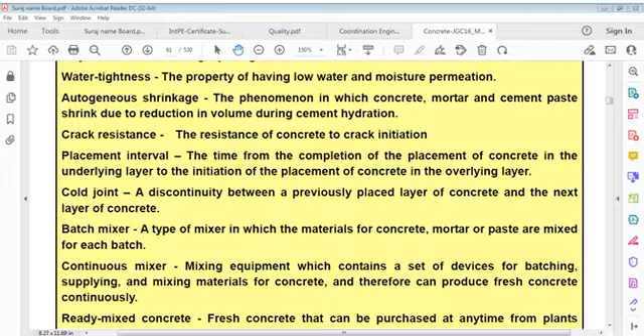Placement interval: time from completion of placement of concrete in underlying layers to initiation of placement of concrete in overlying layers. Cold joint: a discontinuity between a previously placed layer of concrete and the next layer of concrete.

Batch mixer: a type of mixer in which materials for concrete, mortar or paste are mixed for each batch. Continuous mixer: mixing equipment which contains a set of devices for batching, supplying and mixing materials for concrete, and therefore can produce fresh concrete continuously.

Ready-mix concrete: fresh concrete that can be purchased at whatever time from plants which possess facilities for manufacturing concrete with desired properties.

Sheathing and sheeting: wooden, metal or plastic panel type formwork for work directly adjacent to concrete.

Equivalent horizontal conveying distance: total distance of horizontal concrete pipes and the equivalent horizontal distance converted from the length of vertical pipe. bending pipe, taper pipe, flexible hose.

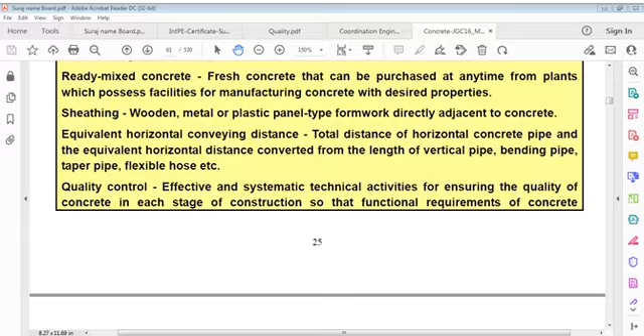Quality control: effective and systematic technical activities for ensuring quality of concrete in each stage of construction so that functional requirements of concrete structures are satisfied.

Inspection: work of judging whether the quality of concrete meets required criteria or does not.

Control charts: charts used to determine whether construction is proceeding per schedule, or to maintain a steady construction process.

Mass concrete: concrete member or structure whose size is relatively large, and consideration of temperature rise due to heat of hydration is of great concern during design and construction.

Plasticized concrete: an already mixed concrete is called plasticized concrete if a superplasticizer is added into it and a thorough mixing is carried out afterwards to increase flowability.

Standard curing: a method to cure in water or in moist condition under nearly 100% humidity while temperature is kept at 20 plus or minus 3 degrees Celsius. That is standard curing.

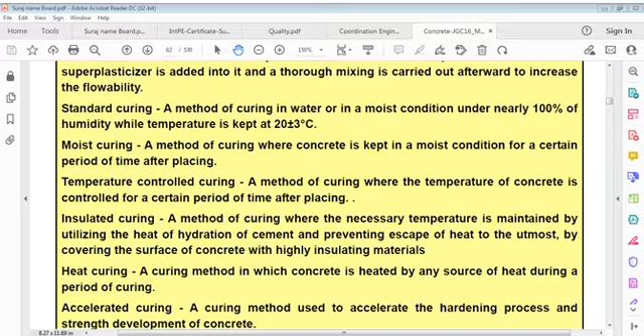Temperature control curing: a method of curing where the temperature of concrete is controlled for a certain period of time after placing. Insulated curing: a method of curing where necessary temperature is maintained by utilizing heat of hydration of cement.

Insulated curing: a method of curing where necessary temperature is maintained by utilizing the heat of hydration of cement and preventing escape of heat to the utmost by covering the surface of concrete with highly insulating materials.

Heat curing: a curing method in which concrete is heated by any source of heat during the period of curing.

Accelerated curing: a curing method used to accelerate the hardening process and strength development of concrete.

Centrifugal compaction: compaction of concrete by centrifugal force using a formwork revolving at an extremely high speed. Casting: production of factory products by placing concrete into a form and applying compaction to the placed concrete.

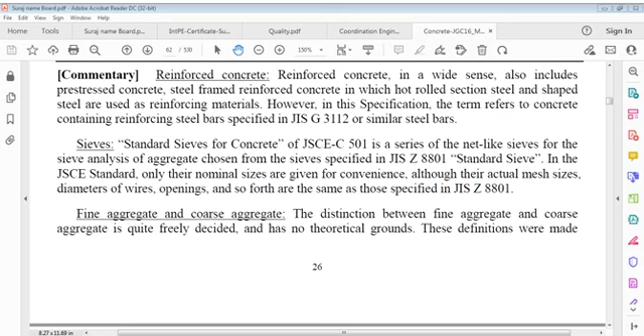Fine aggregate and coarse aggregate: the distinction between them is quite freely decided and has no theoretical grounds. The definitions were made considering customary practice, as aggregate prepared on construction sites is not screened thoroughly. Aggregate particles passing a 5 mm sieve are frequently included in coarse aggregate, and particles retained on a 5 mm sieve in fine aggregate. Therefore, a 15% allowance in each case has been given.

We'll read this later on, it's a long one. So let's go back to something else now and see how this works. I'll also give a little background of myself today, just for your information. I'll give it again.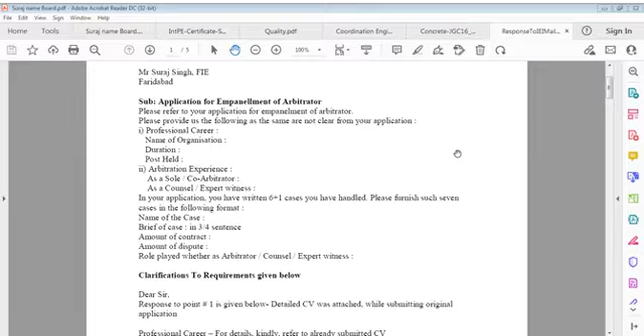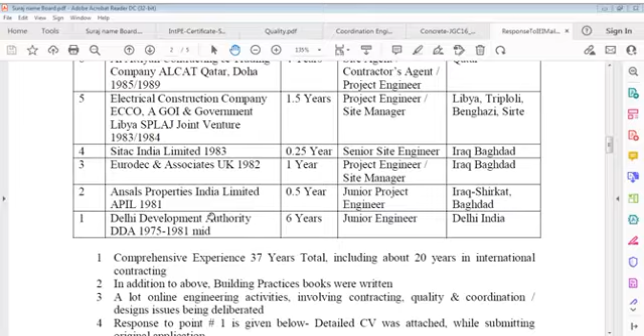I indicate where I started. My first assignment was Delhi Development Authority, 1975-1981, 6 years, junior engineer. Then my second appointment was Ansals Properties India Limited in 1981, where I worked for 0.5 years as junior project engineer in Baghdad, Eurodec & Associates, UK, in 1982. I worked for 1 year or more as project engineer, site manager, Baghdad, Sitac India Limited, 0.25 years, senior site engineer, Baghdad.

Electrical Construction Company, ECCO, Government of India and Government of Libya, SPLAJ joint venture, 1983-1984, project engineer, site manager, Benghazi, Tripoli and Sirte, Libya. Al Attiyah Contracting and Trading Company, ALCAT, in Doha, Qatar, 1985-1989, 4 years, site agent, contractors agent, project engineer, Qatar. Sky Associates, Delhi, India, 1989-1994, own practice, 5 years, consultant, planner, designer. Midmac, 1995-96, project office engineer, Qatar, Ras Laffan LNG, for LNG tanks and villa.

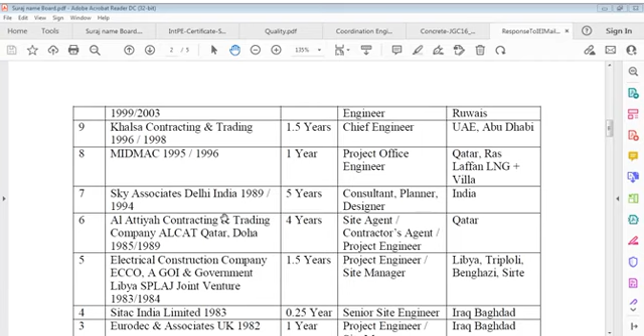Then Khalsa Contracting and Trading Company, 1996-98, 1.5 years, chief engineer, UAE, Abu Dhabi. Then Al Jaber Energy Services, 3.5 years, project office, UAE, 1999-2003. Housing, Al Huda Contracting Engineering Works, 2003-2004, 1 year, project manager, Qatar, Doha, Mesaid. Al Jaber Energy Services, UAE, 2004-2008, 4 years, senior project engineer, tendering, estimation, contracts, UAE, Abu Dhabi. Housing designs, construction of house in 2008-2010, 1.5 years, India, Bharat, Hyderabad. Pat Engineering, 2010, 0.5 years, project manager, Qatar, Doha.

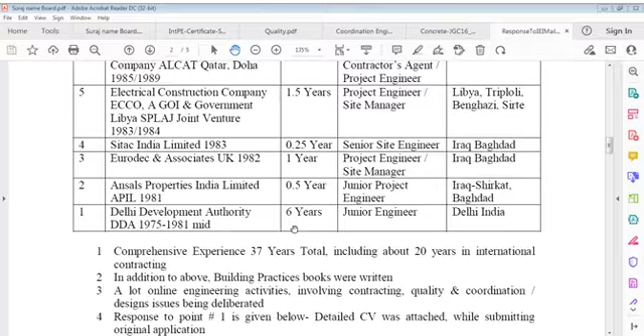Alawi Tunsi Contracting Establishment, 2010-2011, 0.5 years, project manager, Jeddah, and Pat Engineering, 2010, 0.5 years, project manager, Qatar. Engineering arbitration consultancy, 2012-2016, 5 years, independent, India, and independent practice, current knowledge dissemination online. Just a brief, then after that, comprehensive experience is 37 years total, including about 20 years in international contracting.

This experience is only for companies, others are not taken into this, like what happened on the internet, taking information but not. In addition to the above, building practice books were written, a lot of online engineering activities involving contracting, quality and coordination, design issues being deliberated. A response to point number 1 is given now, this is about certain arbitration cases where I used abstract concepts. So that's why I say close this now.

So we come back here, and I'll discuss all this CV issues later on. Now we are here to look, okay, close this. Maybe I have to finish by 2:30, let me take a few minutes more. And before that, I'd like to show you my CV also, if possible, just for information.

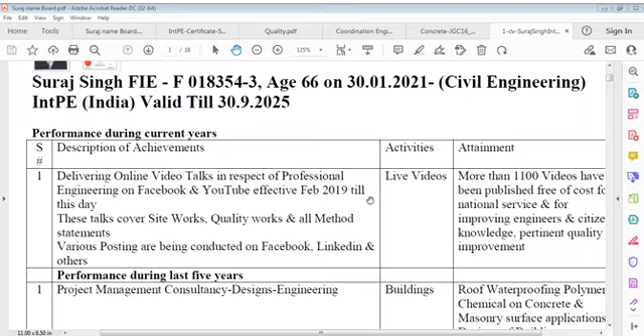Maybe you are not interested, but if you are, you can see my CV here, that is the March 2020 photo, but that's no problem, 14 December 2021, I can show it. So this is my CV, just for reference, not going to read it, just for indication it is the CV. I'll discuss it next time, what it means, how long it is.

So I show it to you, I close it now, and I say, now what's my point of view here, it's different, I can start.

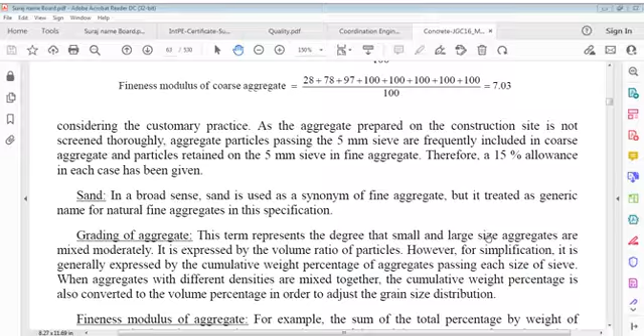We have gone through today with specifications. Let me browse also this cement file, this is of course something I will take up later on, I'll go back to this page, I think it's around 60, so it is 60 something, we'll discuss this later on. And coordination engineering file that I said, the quality file, so what we were discussing, the quality file, engineers need a detailed definition, and let us see what actually points, few points, not all, these are, and how we can handle this, how we can take care of this, and that's what we have to decide.

Just a few minutes, I think. Information about engineers' detailed deliberations must be done. Information must be brought to those personnel who require it, provided at the right time for the right requirement, and quite rightly duly coordinated.

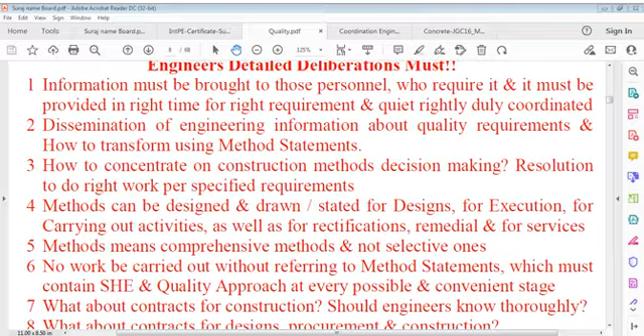Dissemination of engineering information about quality requirements and how to transform using method statements, how to concentrate on construction methods, decision making, resolution to do right work for specified requirements. Methods can be designed and drawn, stated for designs for execution, for carrying out activities, as well as for rectifications and remedial service.

Methods means comprehensive methods, comprehensive, not selective. No work should be carried out without referring to method statements, which must contain safety, health and environment, and quality approach at every possible and convenient stage.

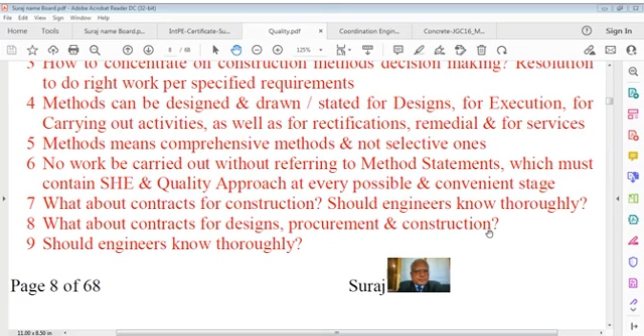What about contracts for construction? Should engineers know thoroughly? What about contracts for designs, procurement and construction? Should engineers know thoroughly? Do we organize to design quality contracts, or do we go per lines decided by others? Should we ignore the power and impact on works and quality performance that contracts can have on designs and prosecution? Do our engineers have interest in contract designs, drawings, activities, which always remain very complex and certainly impact on contract performance and contract related disputes?

Are our engineers those interested in design activities not inclined to involve with construction activities? And if not, what are valid reasons? What's the issue that engineers are not inclined to work in coordination activities that impact on quality of designs and quality of construction? Should we respect project contracts, or should we move without such contracts?

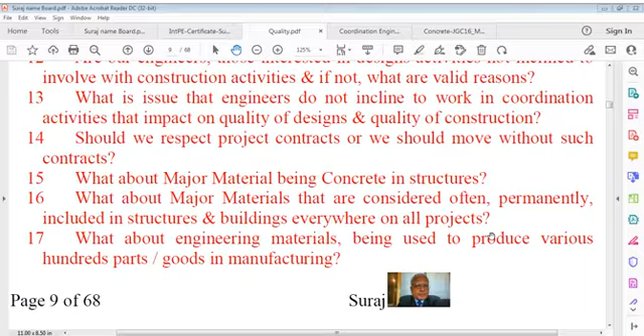What about major materials being concrete in structures? What about major materials that are considered often permanently included in structures and buildings, even everywhere on all projects? What about engineering materials being used to produce various parts and goods in manufacturing?

What is the provision by government to force production and constructions to be delivered with quality compliance? What can be the certain reason that quality requirement is being ignored by the nation? What reason exists that engineers are not able to conduct required contributory roles towards the quality domain? How can quality control and systems be worked out for the best organization in this regard?

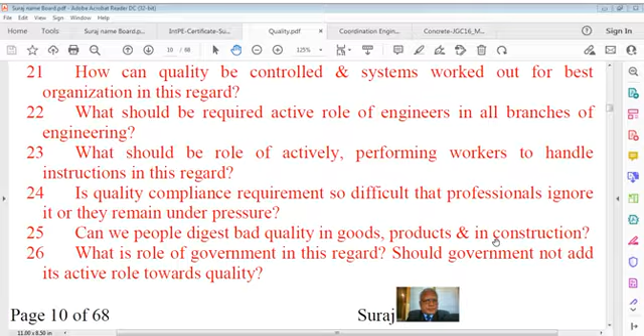What should be the required active role of engineers in all branches of engineering? What should be the role of actively performing workers to handle instructions in this regard? Is quality compliance requirement so difficult that professionals ignore it, or do they remain under pressure? Can people digest bad quality in goods, products, and in construction?

What is the role of government in this regard? Should government not add its role? Yes. Can we people digest bad quality in goods, products, and in construction? What's the role of government in this regard? Should government not add its active role towards quality? What should be the role of customer and consumer or end user in this relation? Should end user or customer not be awakened to know quality issues?

So many questions are there. We'll continue these questions because these are very important questions and we have to answer them.

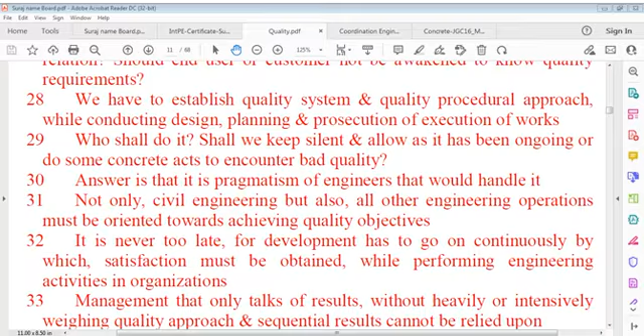Who shall do it? Shall we keep it silent, allow it as it is, as it has been ongoing, or do something concrete to encounter bad quality? The answer is that it's proper pragmatism of engineers that would handle it. Not only civil engineering but also all other engineering operations must be oriented towards achieving quality objectives.

It's not too late for development. It has to go on continuously, on a basis by which satisfaction must be obtained while performing engineering activities in organizations.

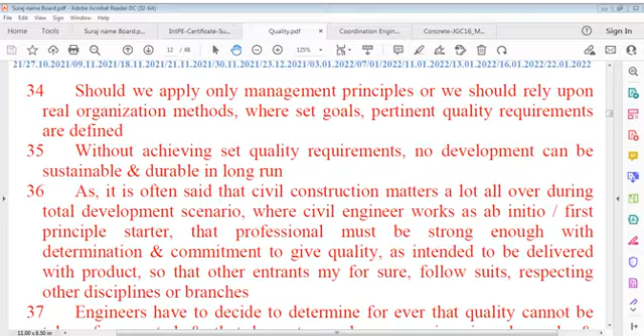Management that only talks of results without heavily or intensely weighing the quality approach and sequential results cannot be relied upon. Should we apply only management principles, or should we rely upon real organization methods where set goals and pertinent quality requirements are defined? Without achieving set quality requirements, no development can be sustainable and durable in the long term.

We have to keep it online and we have to move further. Meanwhile, it's only 2 hours 30 minutes. I'd like to take it today, and we'll see if we continue it next time. And that's important, of course, and we have to see that.